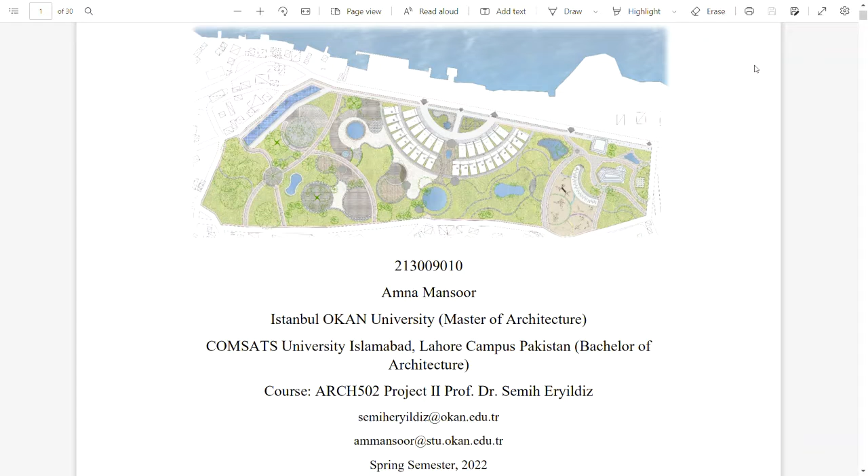As an introduction to the concept of the project: increased greenhouse gas emissions, global warming, ozone layer depletion, climate change, and ecosystem degradation are all consequences of irresponsible natural resource exploitation on a global and regional scale. Construction activities play a key influence in the emergence of these issues, and as a result, it is critical that structures have long-term sustainable qualities that lessen environmental impacts during their full life cycle.

What is an ecological settlement? Ecological settlements are communities in which someone lives fully conscious with facilities such as nourishment, housing, jobs, education, and health. It is a traditional or intentional community that strives to be more socially, culturally, economically, or environmentally sustainable. All the users have a holistic approach to basic critical issues such as social interaction and various actions that are viewed as addressing people's basic needs.

These issues have many detrimental repercussions on the universe, ranging from microscaling to macroscaling. The future threatens the acceptable values of a balanced ecosystem. The foundation of the original framework is anthropology and psychology research. An eco-settlement is a human-scale, full-featured settlement where human activities can coexist with the natural world in a healthy way.

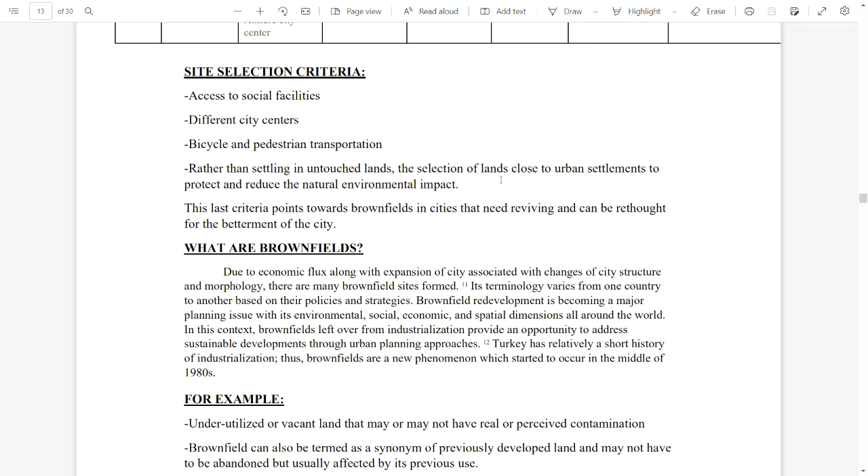So the site selection criteria is to access social facilities, different city centers, bicycle and pedestrian transportation. Rather than settling in untouched lands, the selection of lands close to urban settlements helps protect and reduce the natural environmental impact.

This last criteria points towards brownfields in cities that need reviving and can be rethought for the betterment of the city. To explain what brownfields are, due to an economic flux along with expansion of cities associated with changes of city structure and morphology, many brownfield sites are formed. Its terminology varies from one country to another based on their policies and strategies. However, brownfield redevelopment is becoming a major planning issue, with environmental, social, economic, and spatial dimensions all around the world.

In this context, brownfields left over from industrialization provide an opportunity to address sustainable development through urban planning approaches. Turkey has a relatively short history of industrialization, thus brownfields are a new phenomenon which started to occur in the middle of the 1980s. For example, underutilized or vacant land that may or may not have real or perceived contamination. Brownfields can also be termed a synonym of previously developed land, and may not have to be abandoned but are usually affected by its previous use.

Brownfield sites also tend to contain a large number of unused facilities as well as low quality buildings and utilities, which need to be reused effectively through a comprehensive intervention process. It must be noted that the main objective of brownfield redevelopment is not simply reuse or reintegration of land. It aims to supply a combination of social, environmental, and economic benefits through sustainable development perspectives.

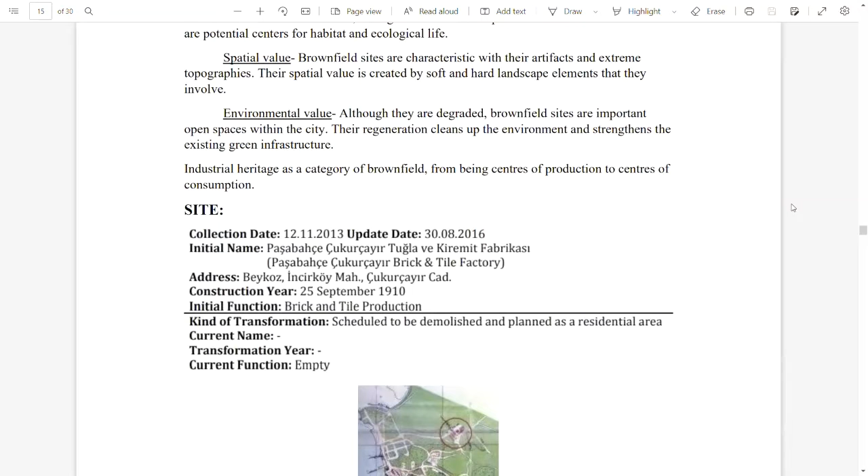So the site that I've selected is a brick and tile factory in Beykoz. The initial name was Paşabahçe Çukurçayır brick and tile factory, located in Beykoz. The construction year was 25th September 1910, but it is scheduled to be demolished and planned as a residential area. It is currently empty. So this is going to be my proposal for the residential area that is to be built upon this site.

The site is located on the east of the Bosphorus River, with a total area of 10 hectares. The programs I'm proposing are a clinic, school, 25 to 50 compact homes, a commercial center, parking, parks, communal vertical vegetation gardens, a waste management area, and a rainwater collection system.

Amenities already present at the site include bus stops, and Beykoz State Hospital, which is 2 minutes by car, 4 minutes by bus, and 9 minutes by walking. Sultaniye Park is present very close to the site. There are elementary and secondary schools that may be used by the residents who will use my site, with access to shopping, entertainment, green spaces, playgrounds, healthcare options, and commute.

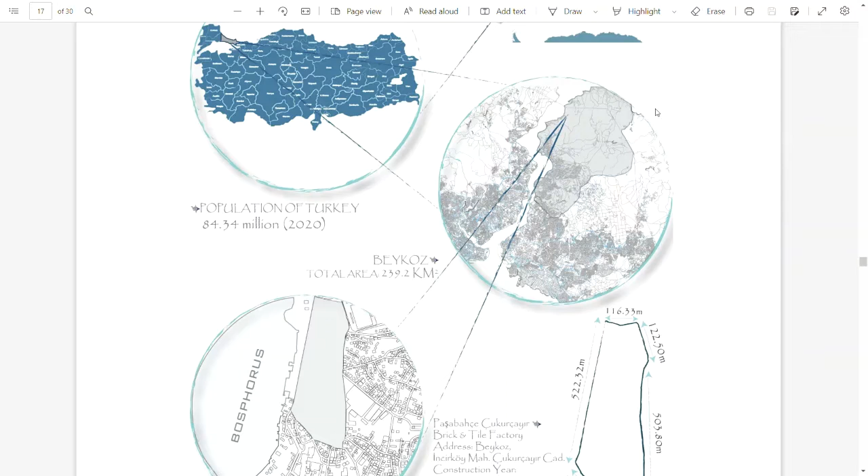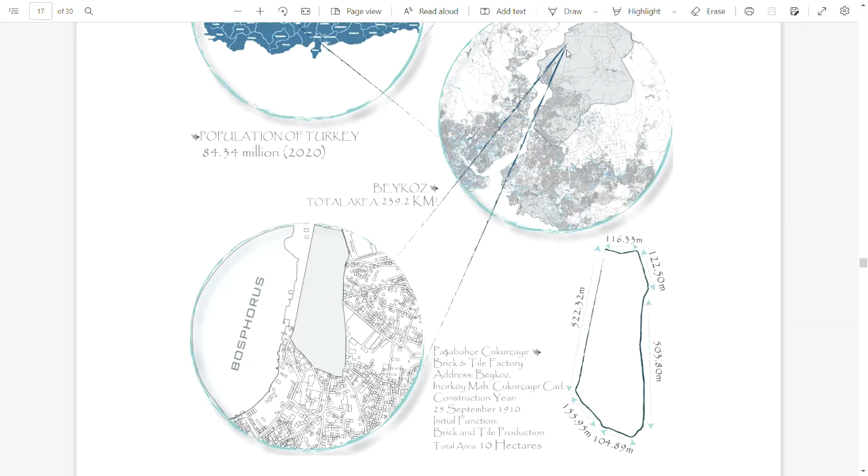The site is located, of course, in Turkey on the world map, and the population of Turkey is 84.34 million as updated in 2020. It is located on the Asian side of Turkey in Beykoz, next to the Bosphorus River.

So the zoning of the site is according to the diagram. There is an administrative zone, a residential zone, a public zone, and green zones. There is also a wind and sun direction diagram and a noise analysis.

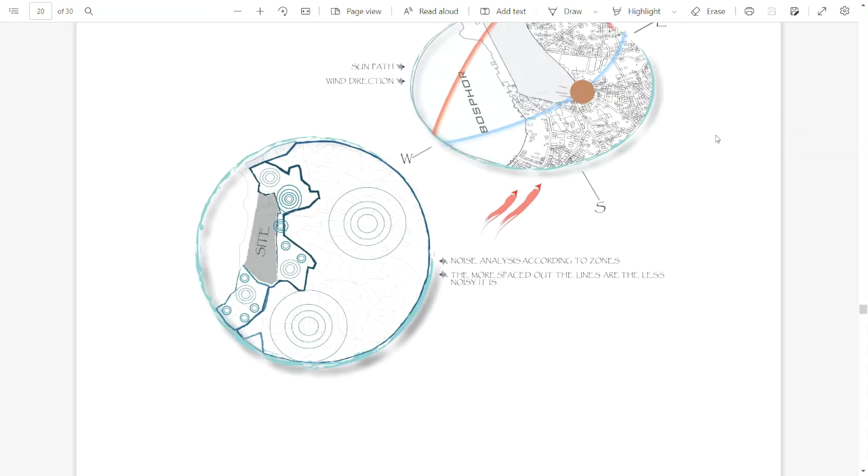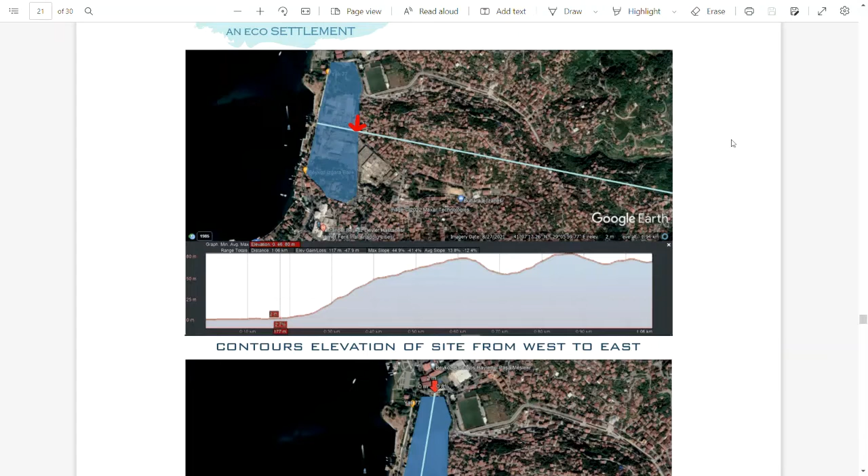The section of the site displays that the selected site is on flat land, and then after a significant distance it turns into contoured land that has a significant slope. However, the site I've selected currently has no significant slope to it.

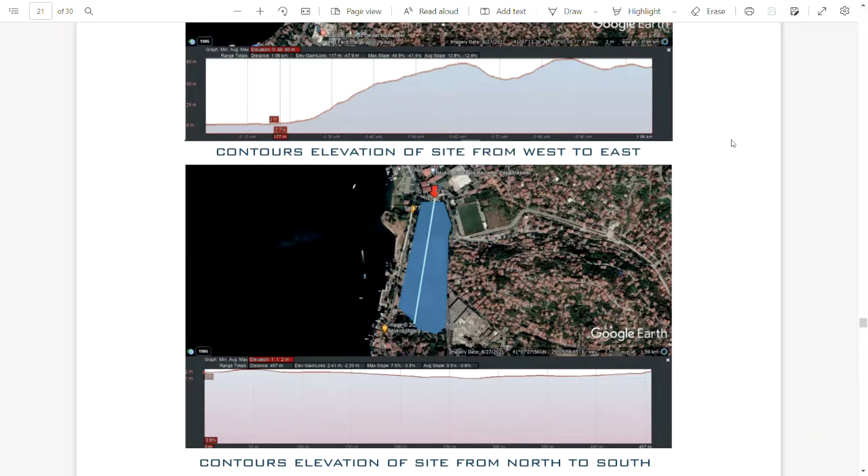The site silhouette is marked as follows, and then the contoured land starts at a distance.

There is the flora and fauna of the site. There are several deciduous trees and several colored trees present in the general area of Beykoz. And the animal life, marine life, there is average daily sunshine hours, average sea temperature, average rainfall of Istanbul, and

high and low temperatures of Istanbul. The SWOT analysis of the site is as follows. The strengths that I concluded are that the site is water facing, it has an easy commute, it is in a well-developed area, and since it is near water, it will help in passive cooling during summers. The weaknesses of the site are that it is surrounded by public and commercial areas, so noise conditions might not be the most suitable. Opportunities, since it is near water, it will help passive cooling, and it may allow aquatic life breeding businesses. And the threats may be flooding.

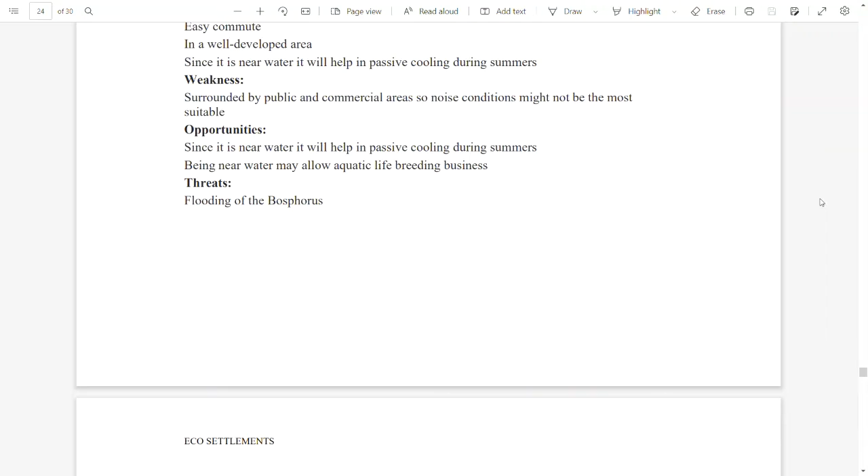The building programs are listed as follows, and the total built area is 11,142.5 square meters, and the total is 14,485.25 square meters with circulation. The site itself is 15% built and 85% green areas, open areas, or unbuilt.

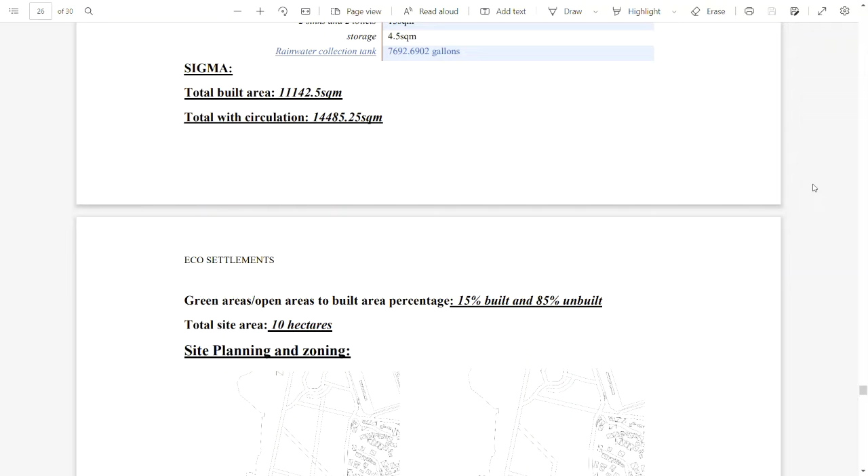The way the site is planned and zoned is through the context lines. The context lines were extended into the site to make it more harmonious with the surrounding context, and that helped make zones. The lines were simplified to make curved lines and to make ease of movement.

Then the zoning was allocated according to the contextual zones. There were green areas, the clinic, preschool, library, and outdoor gym located on the north of the site, so that it is in harmony with the public zones on the north side or in the context.

The settlement that I've designed is called the Resilient City or the Resilient Living. The community is designed keeping in mind ecological principles, with the aim to have participatory processes at the local level and reusing and restoring natural and social settings.

The site was selected based on the idea that rather than settling in undeveloped lands, the selection of lands close to urban settlements should be done to protect and reduce the natural environmental impact. The end design is a close-knit community focused more on living spaces functioning on ecological principles, with no vehicular pollution within the site and use of bicycles or walkways with diverse natural context.

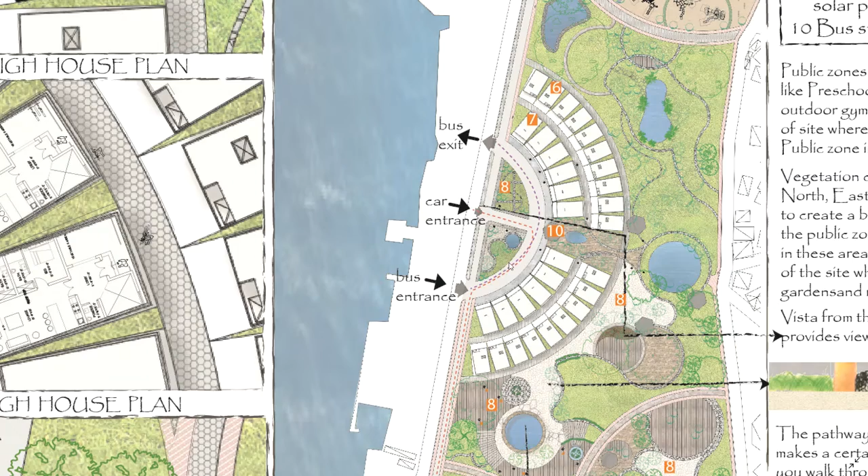This is the car entrance, which leads to the car park at the south, equipped with solar panels that allow it to gather energy throughout the day and provide that back to the site during the night time, used to light up the walkways all around the site.

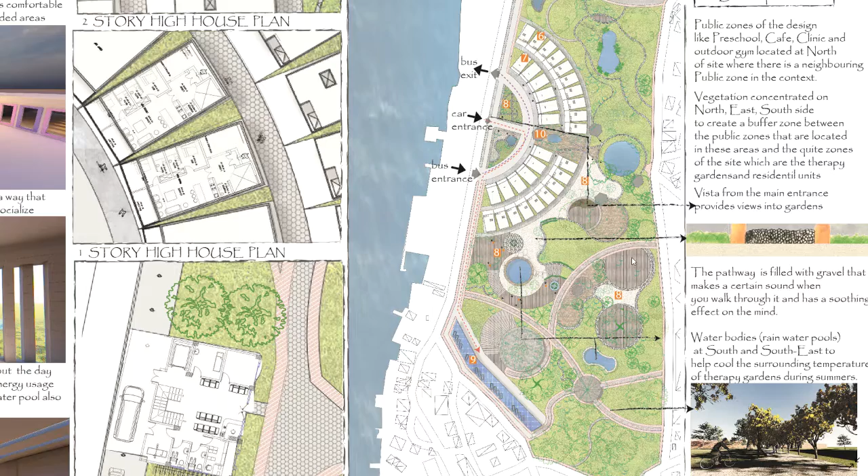The pathway is filled with gravel that makes a certain sound when you walk through it and has a soothing effect on the mind. This is a section for the walkways that are filled with gravel.

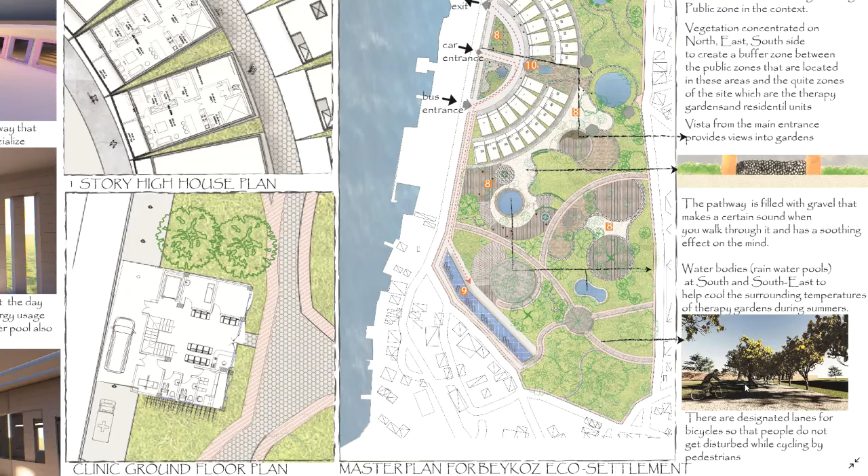There are water bodies, rainwater pools at south and southeast, to help cool the surrounding temperatures of therapy gardens during the summers. These are bicycle lanes shaded through trees, separate from the walking lanes, so that people do not get disturbed while cycling by the pedestrians.

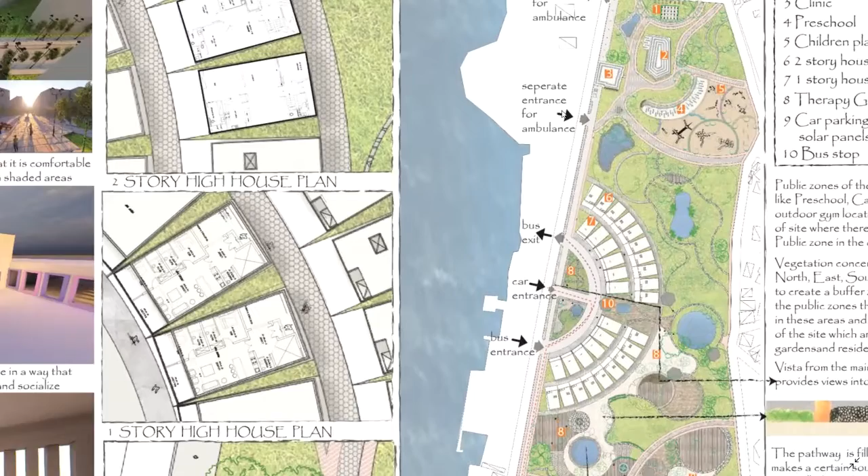The ambulance plan is for the clinic located on the north side, on the northwest of the site. The ambulance has its own access; there is a separate entrance for the ambulance. It comes, enters through this access, goes directly to the clinic parking, and leaves through a separate exit.

There are two kinds of residential units: a two-story house and a one-story, single-story house. Both of these houses have their major views towards the water.

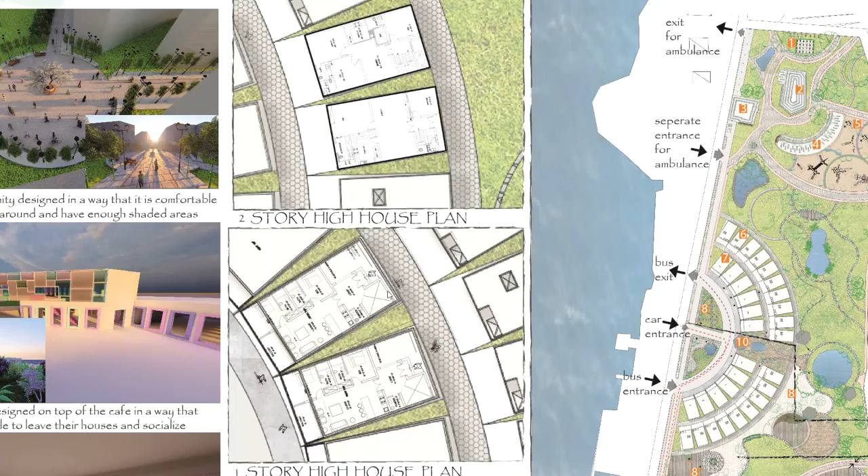Each house has its own vegetation garden, an area where they can grow their own plants and vegetables, and they have bicycle and pedestrian lanes accessing the main access to the house.

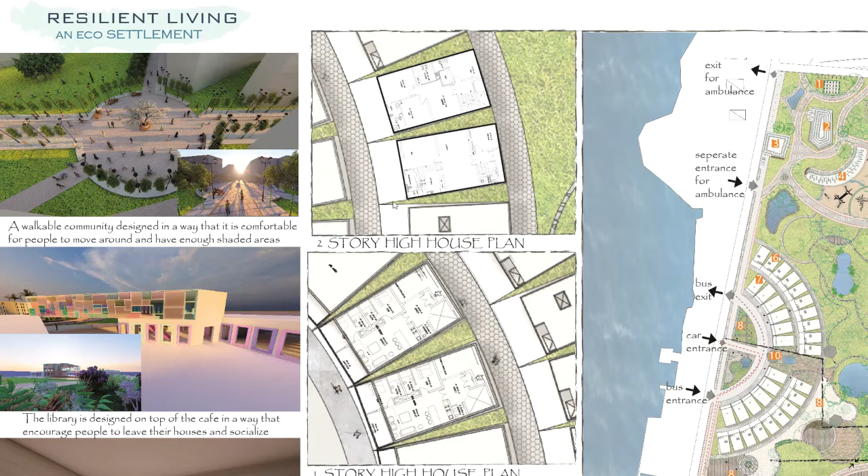These are kinds of nodes present throughout the site, part of a walkable community designed so it's comfortable for people to move around and have enough shaded areas. For example, these nodes allow a lot of pathways to meet at one point, and they act as a communal center or places where people can gather and have interactions.

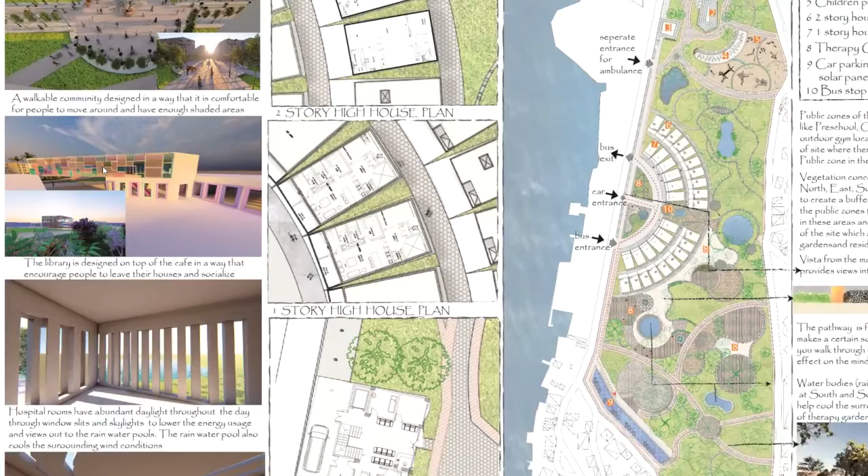The library is designed on top of the cafe in a way that encourages people to leave their houses and socialize. The library allows north light to enter, and there are different colors of glass cladded on it, allowing different kinds of light to enter and create an ambience in the library itself. This is the cafe located under the library.

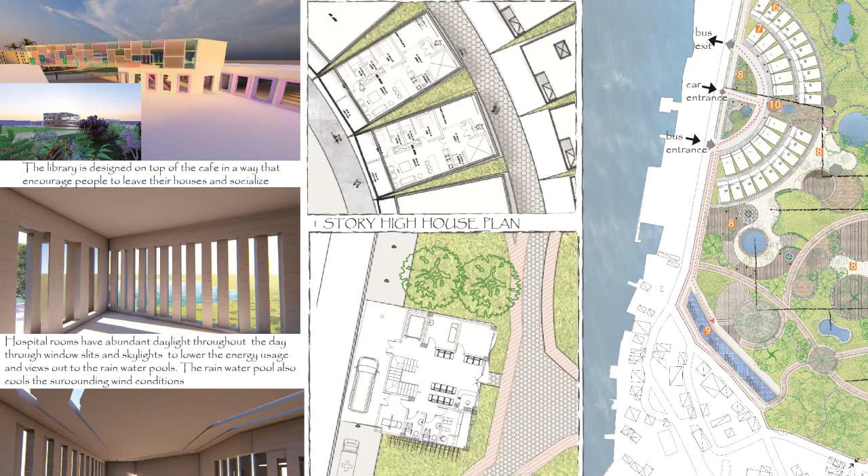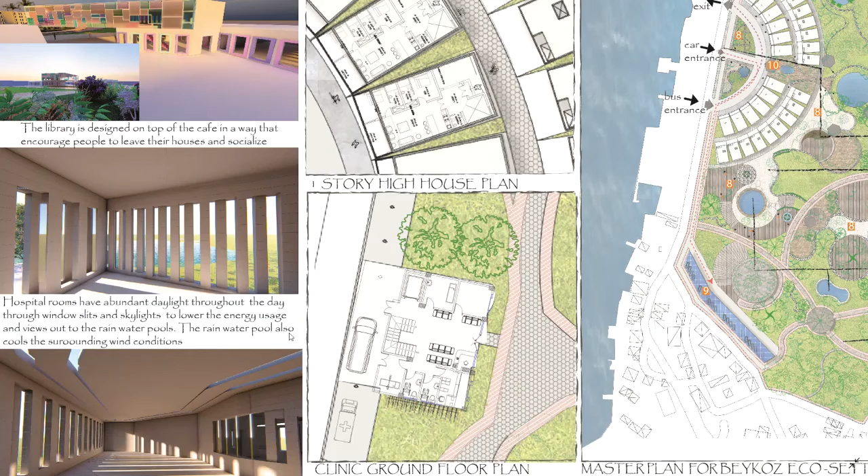This is the view in one of the hospital or clinic rooms. They have abundant daylight throughout the day through window slits and skylights to lower energy usage, and they view outside to the rainwater pools, which also cool the surrounding wind conditions. So there are different kinds of light and design that also act as a part of the design of the clinic.

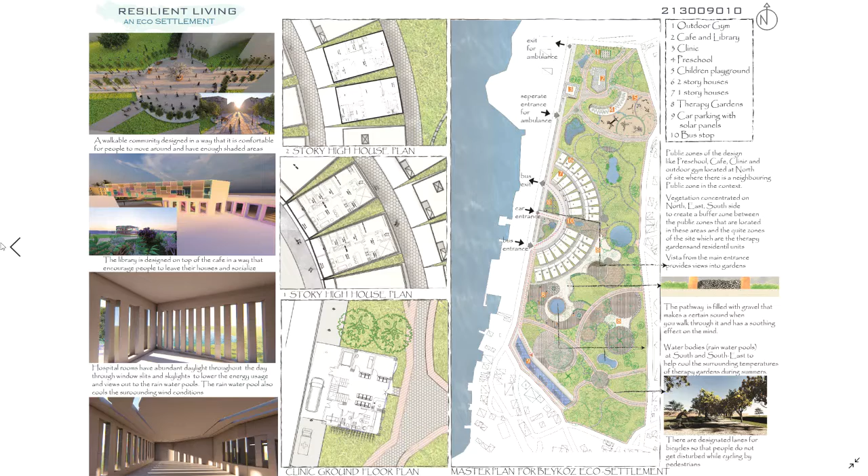These are some ecological sections that are part of the whole design. The first one shows the Bosphorus River and the residential units: this is the one-story house and this is the double-story house. There are cool winds, or sea breeze, coming from the river, allowing the residential units to stay cool during the summers.

The heights of houses vary to avoid obstruction of views towards the Bosphorus. So the people on the second story of this house have easy views towards the river, just as much as the people using the single-story houses.

This is a section showing rainwater collection and rainwater usage. There is a rainwater tank on top of the house, and rainwater pools located all around the site. These pools are connected to the water systems through underground pipes, which connect to the wash basins of these houses. The rainwater is pumped directly into these wash basins, located underground.

These rainwater pipes are heated through geothermal heating, and can be used for different purposes within the house. The rainwater collection tank on top of the house is pumped down to the flush tank of the toilets, and it can also be used for showering.

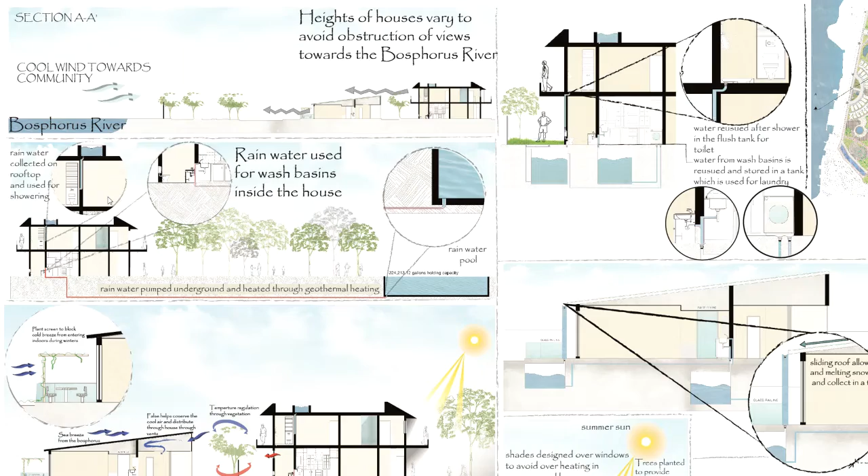This is an ecological section for temperature conditions. In the false ceiling of this house, there are vent systems that allow cool air to enter and circulate throughout the house. There are plant screens to block cold breeze from entering indoors during winters, and these plants lose their leaves during summers, forming a plant screen in winter.

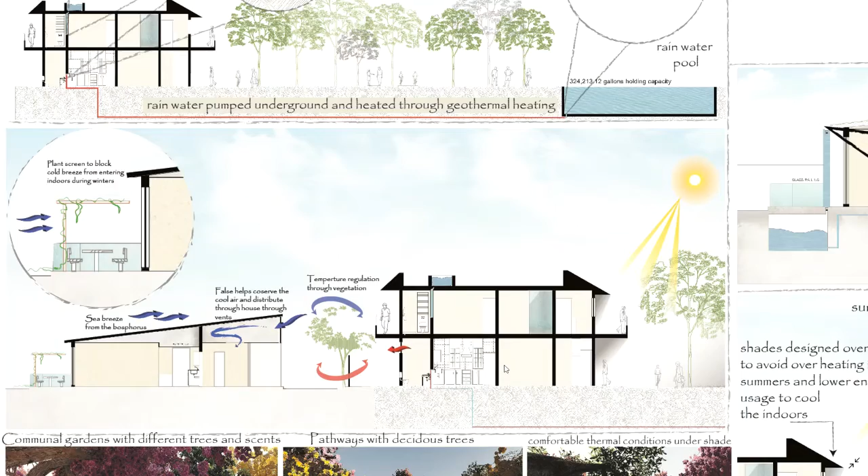There are vegetation or trees planted with cooling properties that affect the wind conditions in this area, providing temperature regulation through vegetation. Then there is another water cycling system.

The water used for showering can be reused in the flush tank for toilets on lower floors. Water from the wash basins is reused and stored in a tank used for laundry later. These pipes show the connection of how water is used in a closed loop throughout the house.

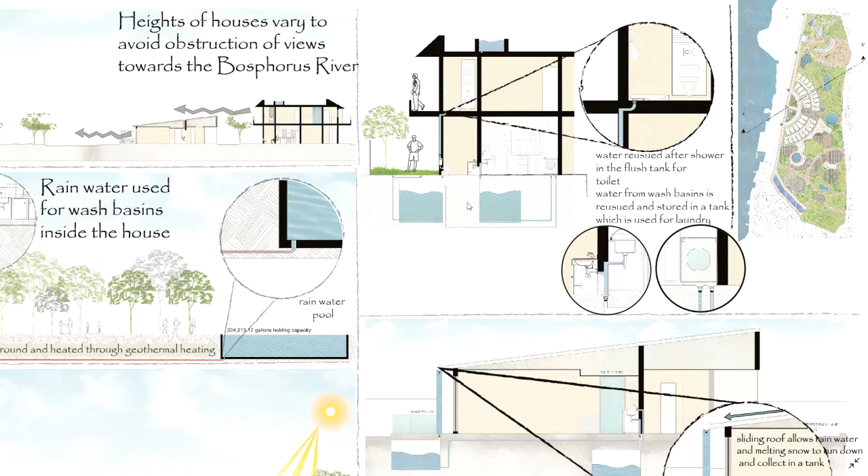There are also slope roofs that allow rainwater to run down into a pipe and collect in an underground water tank, which is then pumped to the wash basins in the house. That water is again collected in a tank and reused elsewhere.

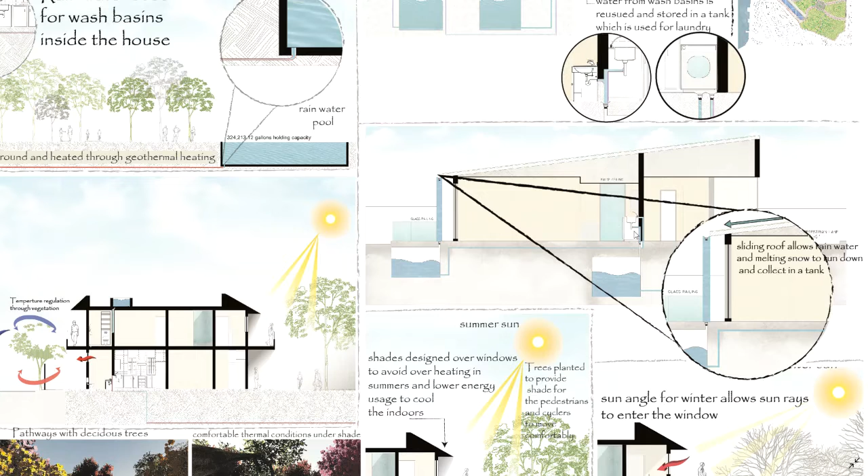The properties of summer sun and winter sun are also kept in mind. Shades are designed over windows to avoid overheating in summer and lower energy used to cool the indoors. Cantilevers or shades are designed so the sun does not reach indoors through the windows during summer.

Trees are planted to provide shade for pedestrians and cyclists to move comfortably. The sun angle in winter allows sun rays to enter the windows directly because the angle is lower, also allowing radiant heat to enter through the windows in winter.

Deciduous trees lose their leaves in winter to allow heat from the sun to enter the house and also reach people walking under those trees.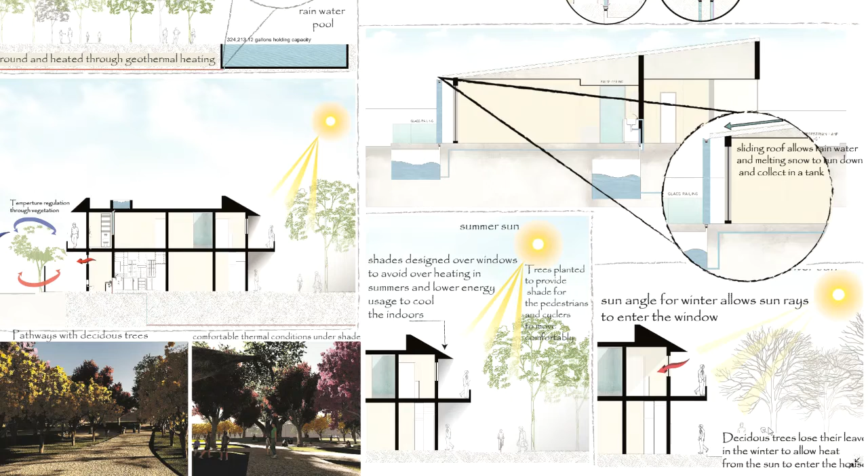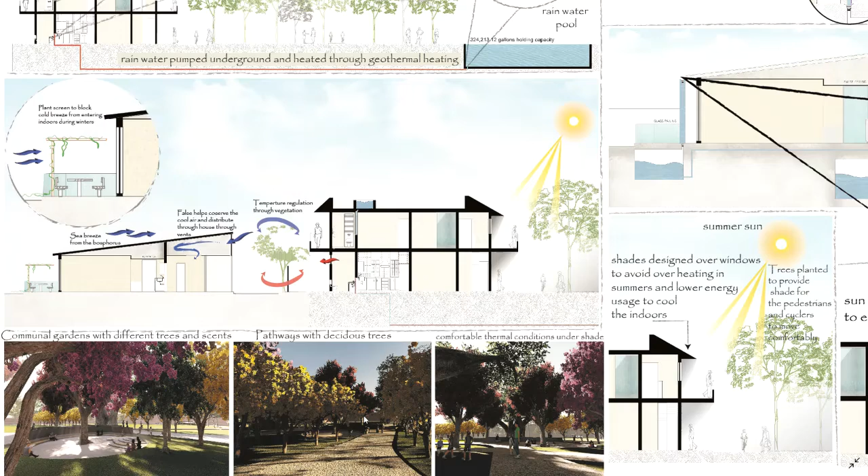There are communal gardens with different trees and scents planted so people can sit under them for communal areas and community meetings. Pathways with deciduous trees are designed, creating comfortable thermal conditions under those shaded trees.

As a conclusion to my whole design process and project, my objective in choosing this topic of study is to address the growing concern around the housing problem of communities that are not paying attention to the environmental impacts based on everyday careless use of resources.

Although we cannot create a complete utopia where there is zero waste and everything works in favor of the planet, ecological settlements aim to become communities in which people live completely aware of their surroundings, with amenities such as food, shelter, education, and health.

Attention is required for how communities are established in the future in a way that takes forward a conscious ability to leave enough behind for generations to come, be it use of power, water, or electricity generation. It is critical that structures have long-term sustainability qualities that lessen environmental impacts during their full life cycle.

Now the question is how to contribute to this idea. There are several approaches, and one is to build ecological settlements. My concept for the whole design was to provide, to the best of available opportunities, an eco-settlement sensitive to the environment, with reduced energy usage, water recycling systems, and reduction of vehicular fumes within its settings.